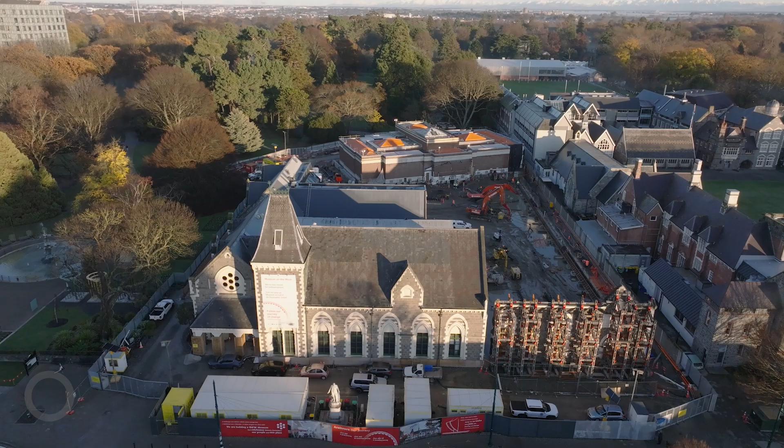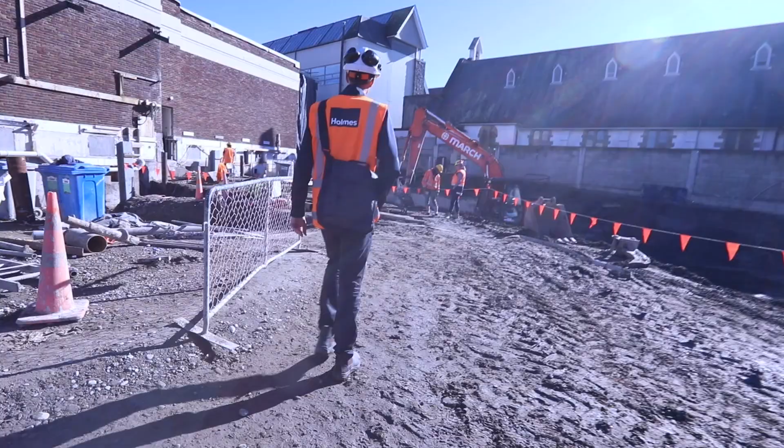My name's Didier Pettinger. I'm a technical director with Holmes New Zealand. I'm the project lead for this redevelopment of the Canterbury Museum.

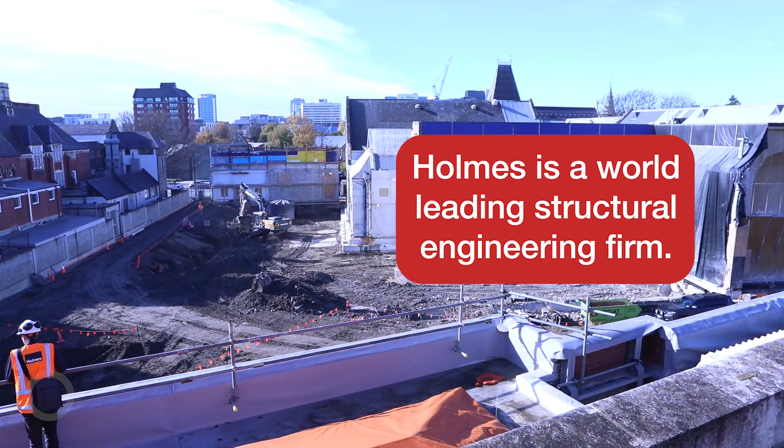At the moment, there is the beginnings of the excavation. The total excavation will be about 25,000 cubic metres of soil, which is about 10 Olympic swimming pools. We are then producing a structure which is going to be about 9,500 cubic metres of concrete. And so that will be the foundations, the main retaining wall, and then the inner box that forms the main basement space that the collection is going to be stored.

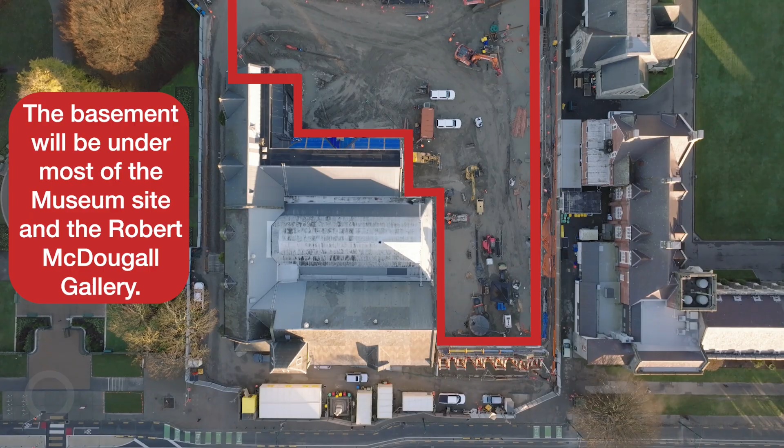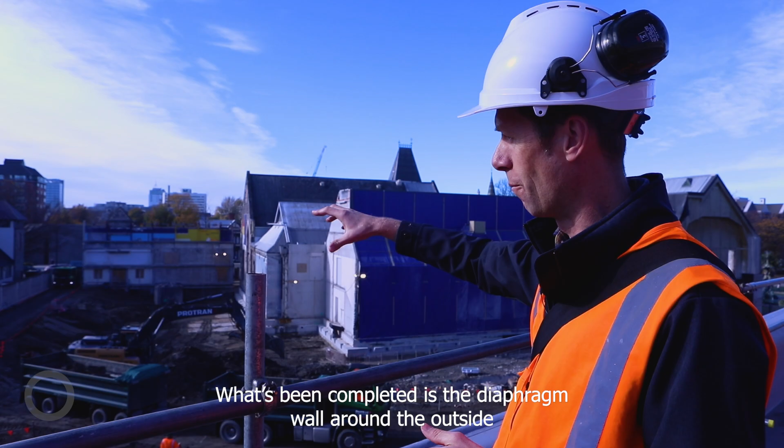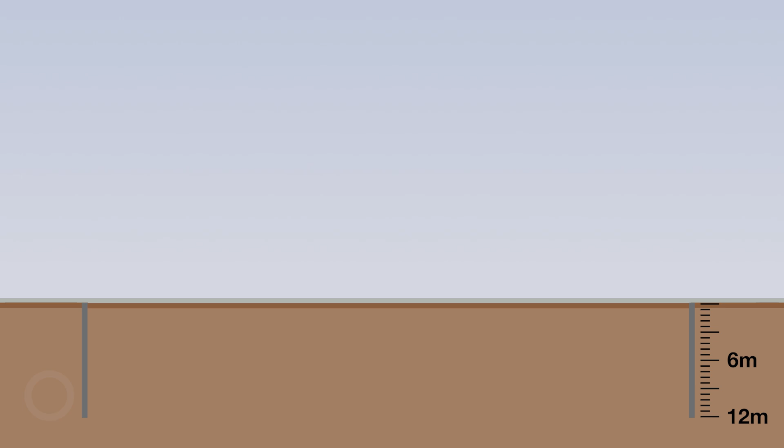What's been completed is the diaphragm wall around the outside. It is a reinforced concrete wall. And that forms a continuous waterproof wall around the outside. The excavation depth in total will be about 6 metres.

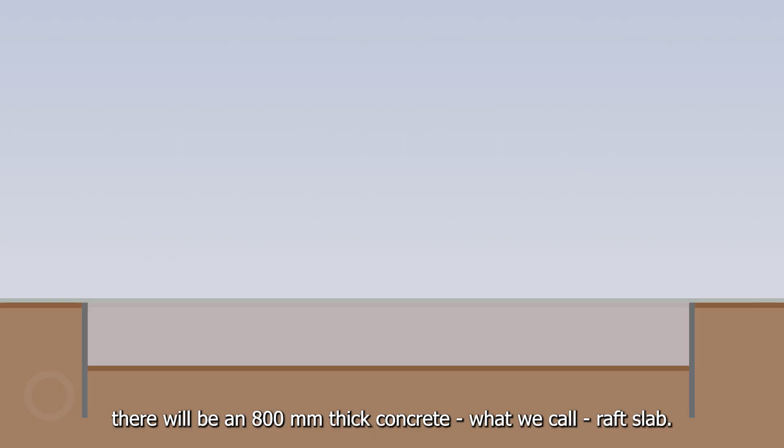And then to the base of the excavation, there will be an 800mm thick concrete, what we call raft slab. And we have a base isolation scheme. That raft slab is heavily reinforced and is tied into the retaining wall, and that completes the box that we then start to build out.

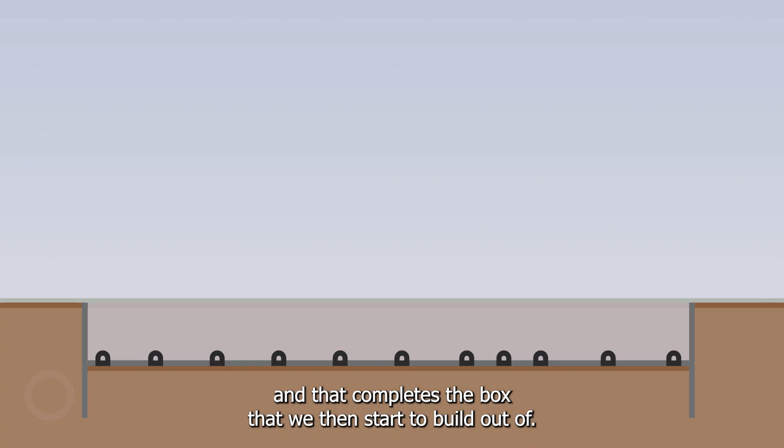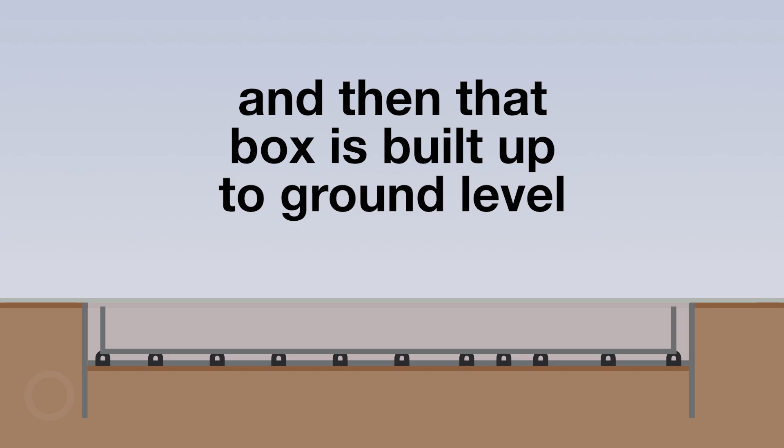The basement construction is a box within a box. The outer box is the retaining wall structure. Within that, there is what we call the inner basement. And then that box is built up to ground level, and on top of that will be the new buildings in the future. And that is actually what houses the museum contents.

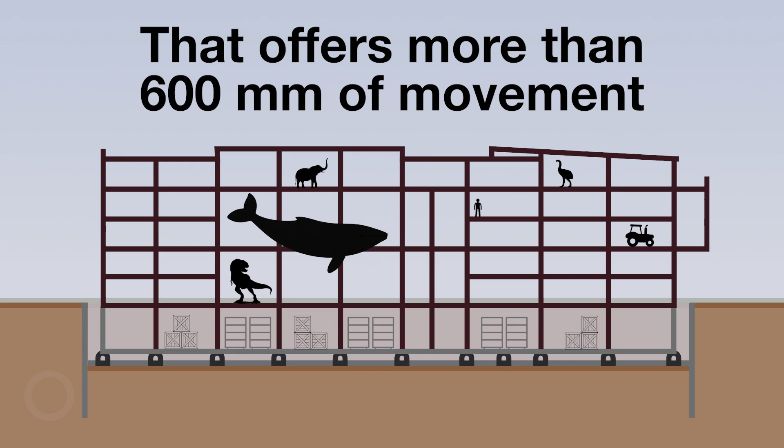The reason for a box within a box is twofold. One is because we're base isolating the building. That offers more than 600mm of movement during an earthquake if needed.

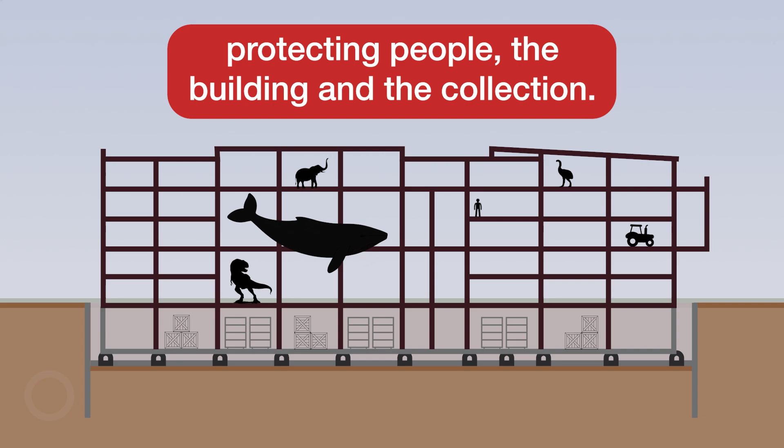The second reason for this box-in-box construction is the water table sits about 3 metres below the ground surface, so the basement will be between 2 and 3 metres below the water table. The waterproofing for the basement is really important.

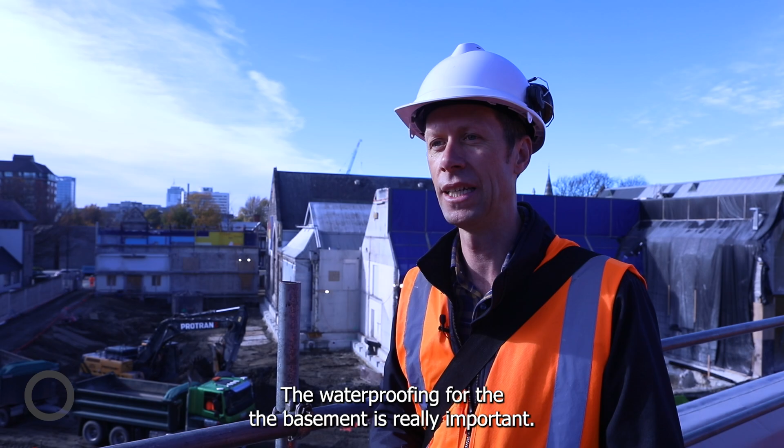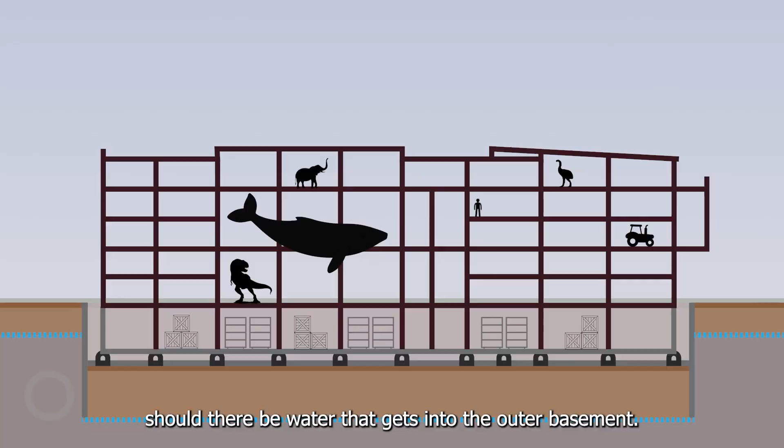That 600mm of what we call rattle space is also the perfect cavity to provide a drainage system should there be water that gets into the outer basement. But then the inner basement itself is lined with a waterproof membrane.

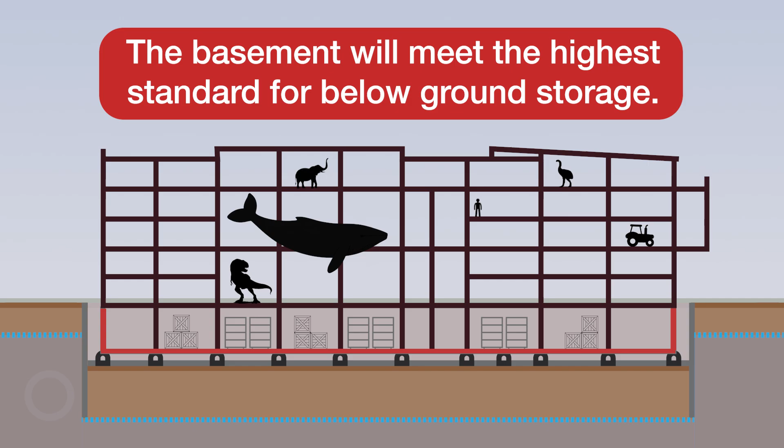I first touched the redevelopment of the Canterbury Museum in 2012, but it's been great to see the progression of the design, and now that we're into construction, see things happening on site.